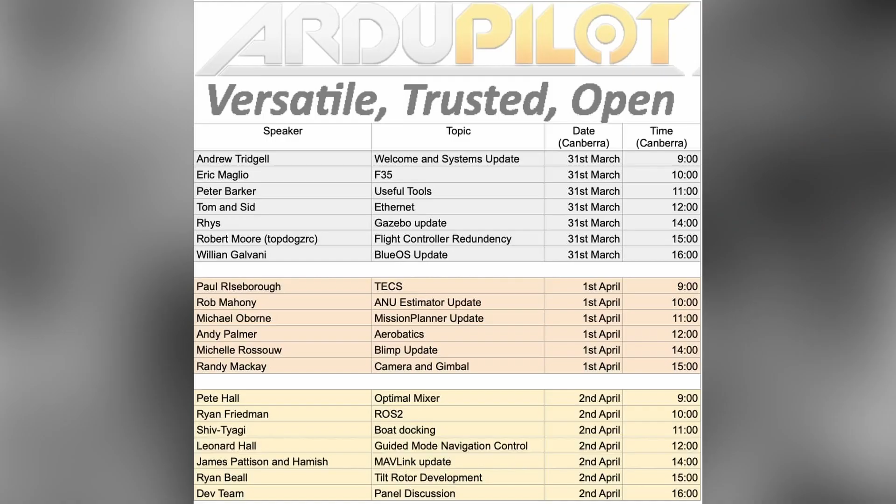At this conference, I'll be talking a little bit about my continuation of work from the last conference in redundant uncrewed aircraft systems.

Wait, is it not sharing again? Oh dandy, let's see. Your screen. There we go. That's good, thank you, okay there it goes. Okay so in terms of... see here, looks like it's the secondary screen. Okay, so let's see, I need to send, let's see, no share, let's try... working now, yeah okay, right.

So in terms of the presentation for the conference, I'll be recapping what my project is about.

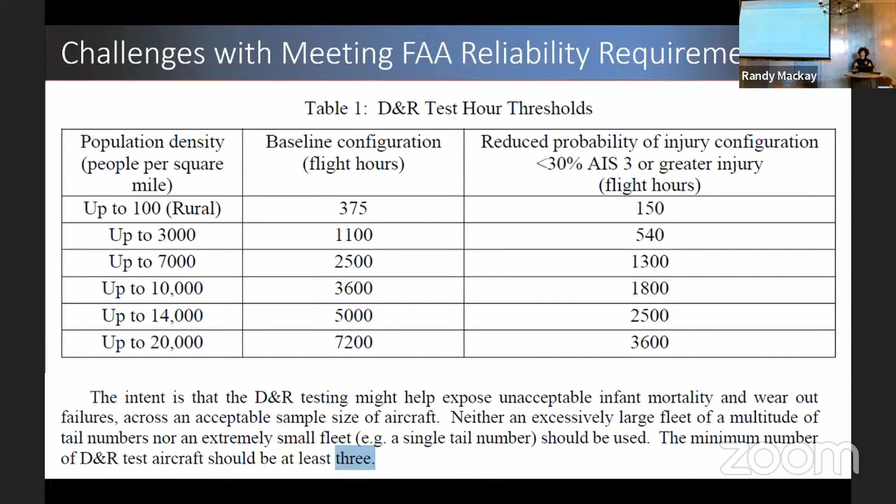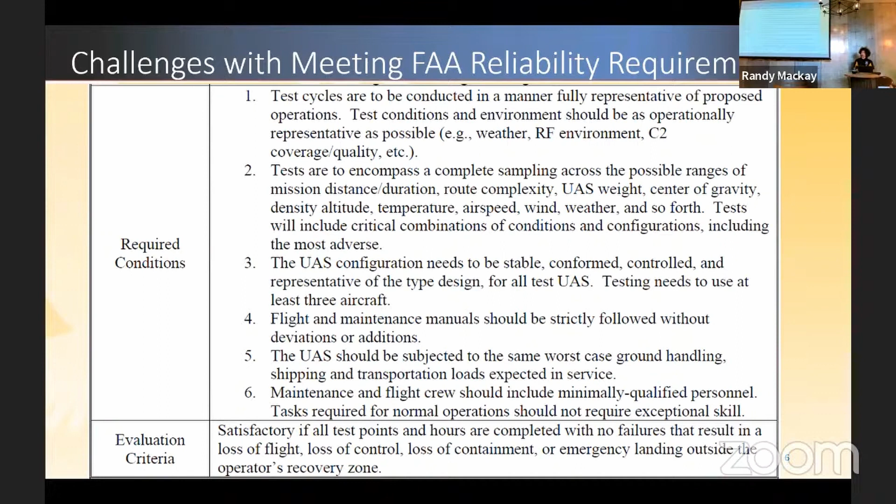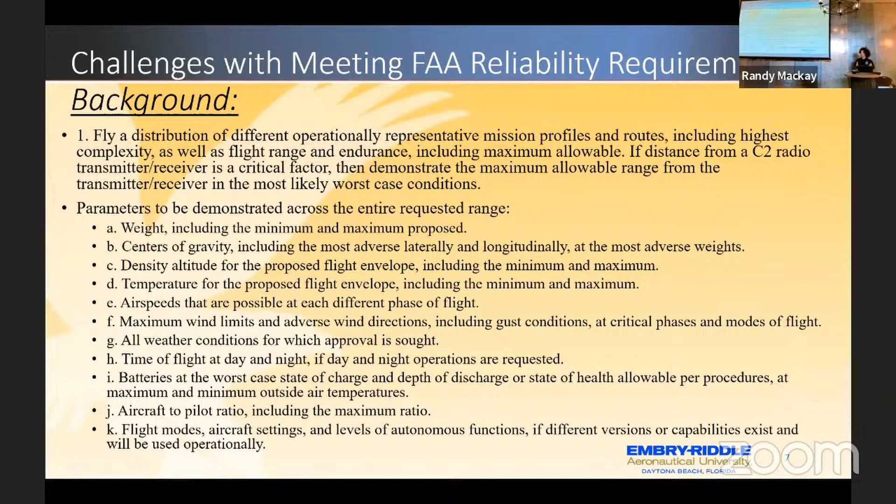And then here's some more background information. Excuse all the text, but it really shows how thorough the process is if you were to go through as an airframe manufacturer trying to get the type certificate.

So this is my current architecture design. I took a model aircraft, the Seagull model Shock Cub. The reason I chose this model was it's a fairly simple bush plane arrangement. It's also the size of a 35cc engine equivalent.

From some of my other airframe experiments, the Flex Innovations RV8, which was an electric low wing, had too short endurance. Then, for another project, I had a 10-foot wingspan airframe, the Bushmaster 120 - it looks like a giant turbo beaver. The problem is that's about 50 pounds, albeit it gets 4 to 5 hours of endurance. That would be within a certain scope, but when I was looking forward, I do want to do things like convert to quad planes. So phase 2 is the standard airframe.

Phase 3 would be essentially doing vertical takeoff and landing testing of the redundant systems. If I were to do that with a large airframe, I'd be at 70 pounds. This airframe, I can be under 50 pounds if I incorporate vertical takeoff and landing hardware, such as a pair of lift booms under each wing. On that note, the airframe did have some hard points to incorporate lift booms where the struts are, so that was another means of convenience.

The airframe gets about 2 hours of endurance, which is fairly ideal. Once you get into the 4-hour mark on a single flight, it hurts a little from the operator on the ground perspective.

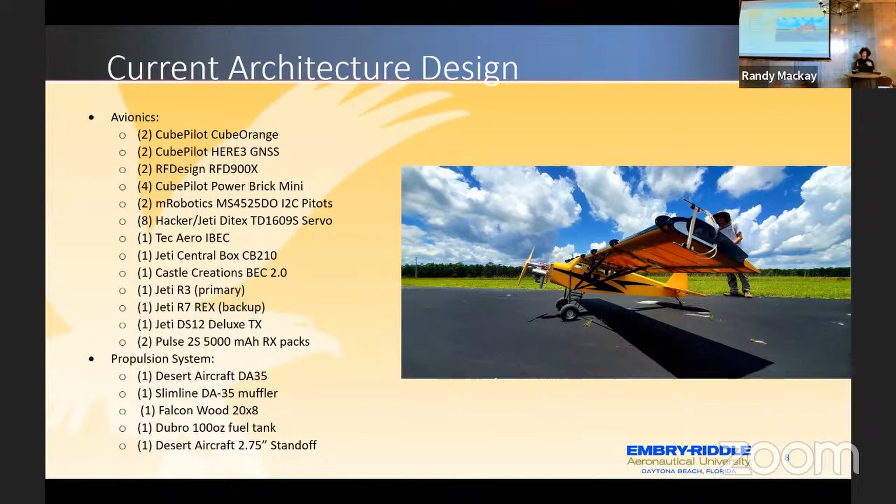On the propulsion system, I went with gas because batteries get really heavy and expensive when you're doing the long flight hours, such as 2 to 4 hours. And it's easier to essentially gas and go with the airframe.

In terms of flight testing hours, I intended to complete a lot more within a year, but many challenges arose. Unfortunately, I did lose access to one of my big test fields where I could go day in, day out. So I had the generosity of a model aircraft field to do my testing, but it was a lot more restricted. Of course, being a master's student as well, you have all the other classes and obligations that you have to do. So within a year to get 31 hours, fairly respectable.

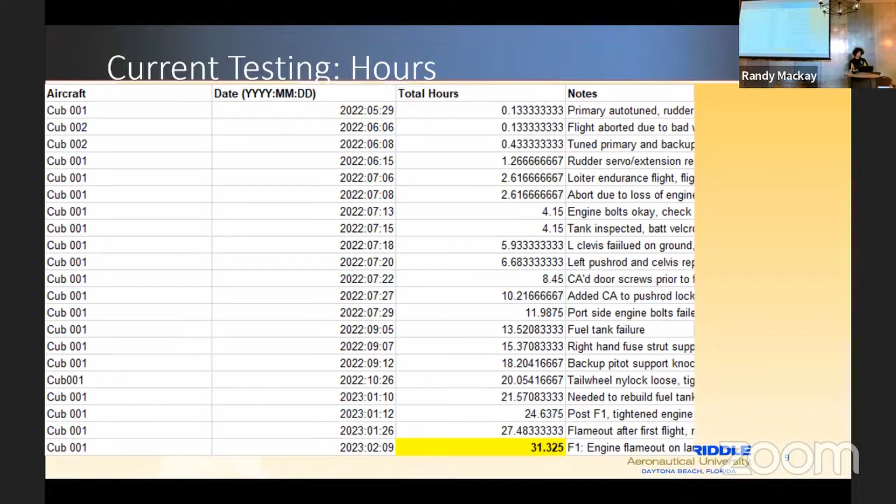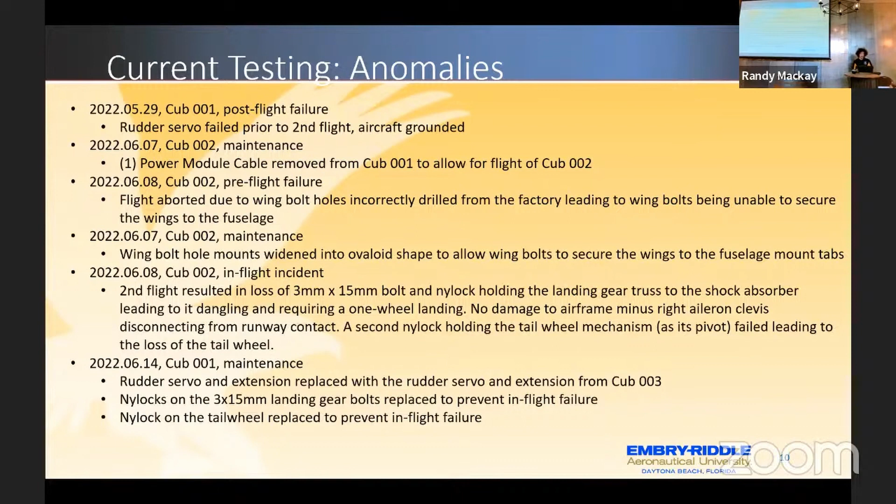There were a lot of things which also got in the way of building up a lot more flight hours as well. I know this is a terrible way to do a PowerPoint with blocks of text, but essentially these are to show that my airframe that I selected wasn't necessarily ideal. Every flight there was a problem, a part broke or some anomaly happened, so I couldn't crank out multiple flights within a day. So my intention was one airframe do 125 hours, next airframe another 125. Instead, I was chasing so many parts breaking on the airframe and a few other minor discrepancies.

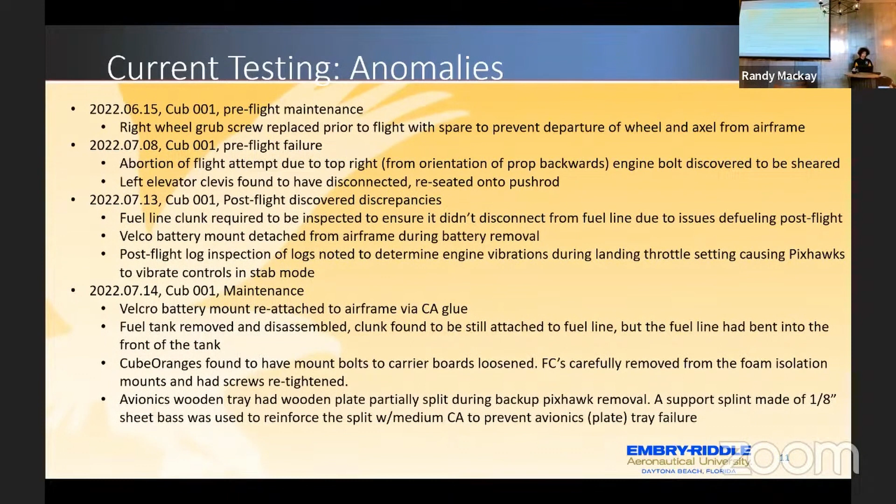There's things like clevises failing and the struts failing, other metal hardware failing. I had a few engine bolts break, and I had a few flameouts. It really shows that going through the flight testing process, depending on the airframe, it can be a real bear if you're trying to get reliability data and everything is breaking.

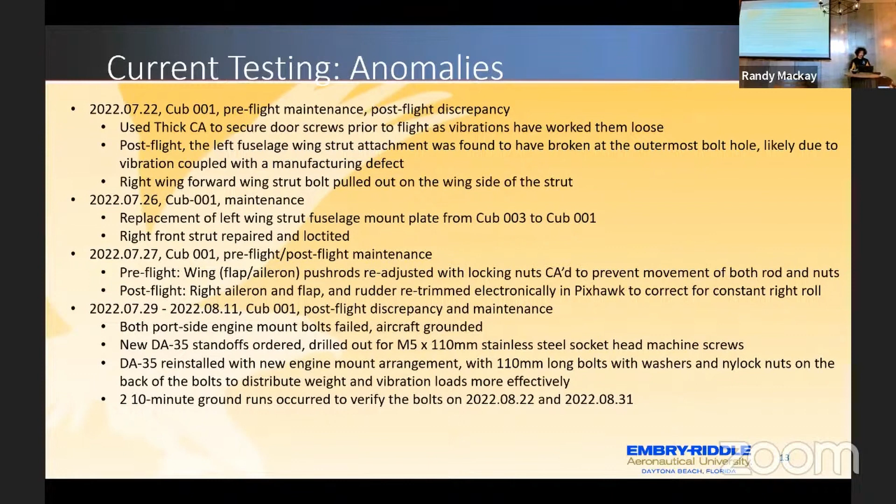This is the kind of data the FAA appreciates. We don't have reliability data, so this is a way to document and say, hey, this is all the issues you could have during sustained flight ops. Then to kind of sum it up, a picture collage showing some of the different things.

You can see metal hardware breaking in the top left. I had an engine gasket let go and it sprayed engine oil all over the airframe. Some of the struts had a screw-in arrangement and they stripped out, so I then had to JB weld them together. And I've had blind nuts just cleanly break on the poor airframe.

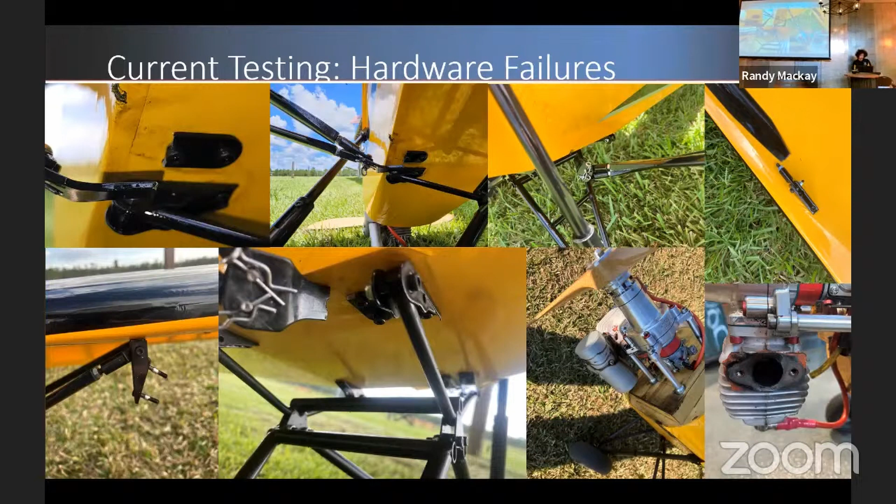I guess this is a better way to show it. So despite those walls of text and the photo collage, this kind of shows over the course of the flights my percentage of failures. Avionics were fairly reliable with exception to a rudder servo dying fairly early on.

The engine bolts breaking - I was pushing the envelope on some windy conditions. I did have some fuel exhaustion events where it would essentially be in the loiter, flame out because the turbulence was excessive, and a 100-ounce fuel tank results in fuel slosh. So air bubble, engine flamed out, land okay.

But the most common were the major anomalies of the struts, clevises, and metal hardware breaking. So the good news is our avionics are fairly reliable. It's the airframes that leave a lot to be desired, and that was a total of 31 failures and anomalies.

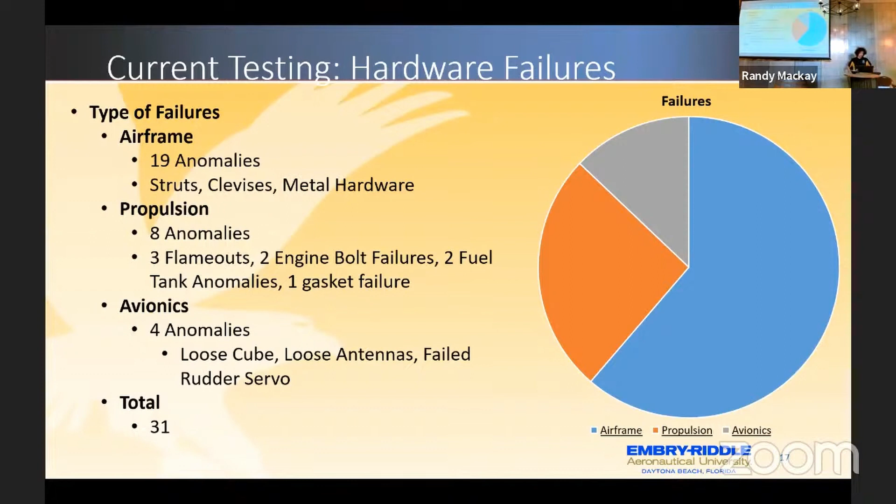In terms of some of my current testing, for my master's capstone I investigate a line replaceable unit of the avionics. This goes into one of the philosophies I appreciate, the right to repair.

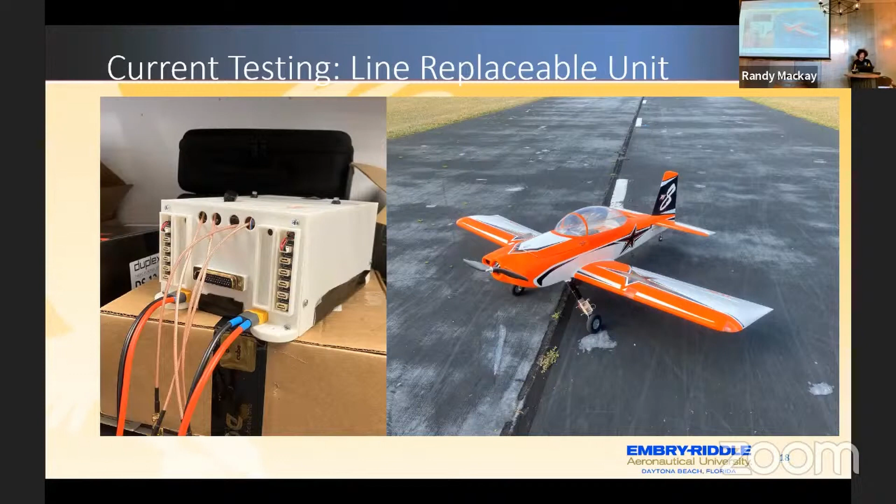One shortcoming I notice of the industry is that many avionics are incorporated into the airframe. If you have an issue with that, you have to send the whole fuselage back to the manufacturer or have the manufacturer fly out. It would be a lot easier for both the operator and the manufacturer if you could remove that avionics unit, pop in a fresh one, and send the faulty unit back if there's a software or hardware bug, because testing only catches so many issues, and Murphy's Law always comes back to haunt us.

So this is the current design. You can see it's two cube oranges, and then you have an RC receiver into each, GNSS for each, an airspeed pitot, and then an RFD 900 for each.

They go into the Jeti central box, which for this I'm using 2-cell LiPos. Depending on what I do, I can have a pair of voltage regulators in line for higher voltage LiPos. The advantage of the Jeti, once again, is I take the Jeti Ditex servos and get telemetry feedback, so if a servo has an issue I can diagnose it instead of guessing whether it failed.

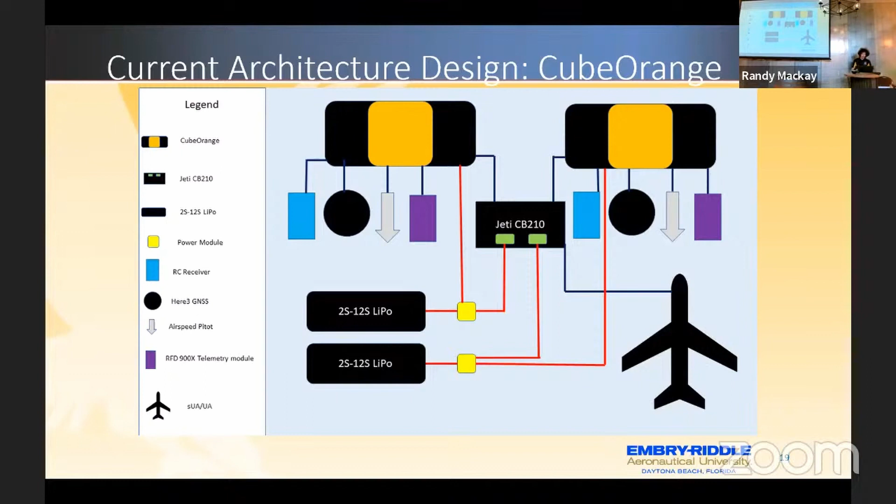And then Philip, I guess you can discuss some of the CubeRed stuff.

So yeah, last year I obviously didn't get to come to the conference - I was otherwise occupied at Formula One. But I did have the pleasure of listening to Rob's talk and got to have a bit of a virtual chat online on that one. Myself and Rob have been interacting ever since, and it's been great, especially how ArduPilot brings all sorts of different people from different places together.

Looking at the redundancy side of things, it's a topic all of us have been talking about for a long time, and a lot of people have done a lot of work on that. A core part of that is the work Leonard's been doing with standby mode, which without it becomes really complicated and messy, a very ugly takeover if you don't deal with some of those I-terms and things like that.

On the CubeRed, we've gone for an architecture which is basically two autopilots in one. We have a primary autopilot that does all the fun stuff like Ethernet and normal day-to-day things, and a second autopilot that can do the simple things. So if something goes wrong, you can basically package what Rob had done with the two cube oranges into a more convenient package.

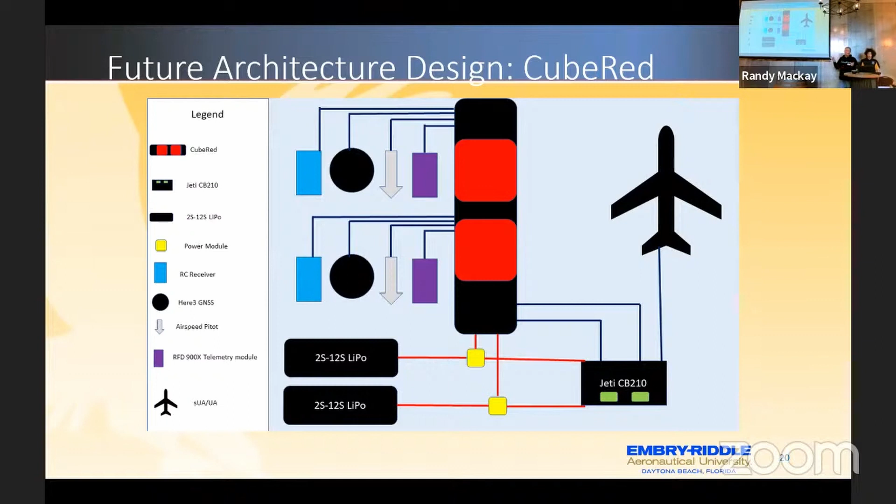However, this is not the only way to do redundancy, and there are other ways coming up that might be a little bit more interesting. You could whack a whole bunch of distributed cubes around the place, which I think is shown in there with 4. That might be a convenient way.

Or another way you could do things is things like our Here 3 Plus and our Here 4 that's coming up soon, Here Pro, actually have all of the components on board to be an autopilot. So rather than having everything in the little vibration isolated box, you can potentially be running an instance of ArduPilot on a node somewhere. So you could distribute it completely.

This little beastie, which I've probably shown a few of you, is our little CAN bus node that we're sort of working on. It has enough power on it to run ArduPilot a few times over as well. So a concept of a more distributed autopilot system on a distributed CAN bus also can deal with issues like structural damage to the aircraft, taking out a CAN line or something like that. It can also be very convenient if you're doing a payload vehicle where you don't actually have a center to the aircraft.

So Rob's been doing some great work on that, and so have many people here. And Sid's been doing some great work on the upcoming architecture of the red, and it'll be really cool to get some of that stuff out and ready.

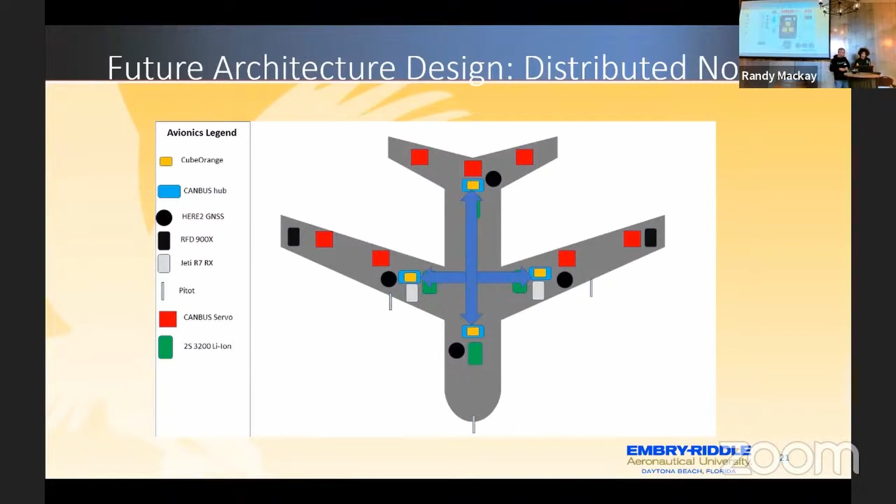Now, to kind of bounce off what Philip said in terms of that carrier board should not be used as a power supply, there was something that came out in the RC community recently from a well-known company called Powerbox Systems, called the Powerbox Royal SR2, I believe. The one thing that really piqued my interest was its new protocol system, P² bus.

Not only did it have the servo outputs, which it provides power distribution to, it had 4 P² buses where essentially one could consider it like, I know this is a bad way to consider it, like a CAN bus node RC equivalent, or better yet, the old S-bus hubs and nodes that you could plug in, except these have telemetry feedback. So I was thinking, well, potentially, I know that this could work.

Why not have something that's both the carrier board for multiple redundant cubes, but also then be a power distribution hub for, say, a giant scale airframe. So we're talking like 25 pounds, 30, 40, 50 pounds, something like a 10-foot wingspan, a larger Group 2, Group 3 UAV. That way you could run something like 16 servos and have that power supply, which didn't burden down a carrier board.

And then have plug out auxiliaries for something like, in my case, I was thinking a DroneCAN Powerbus. So you could have maybe 4 different DroneCAN nodes, which could provide power to. It could then essentially, you could then have those DroneCAN nodes provide telemetry feedback. You could then also control camera systems, maybe have an S-bus out system.

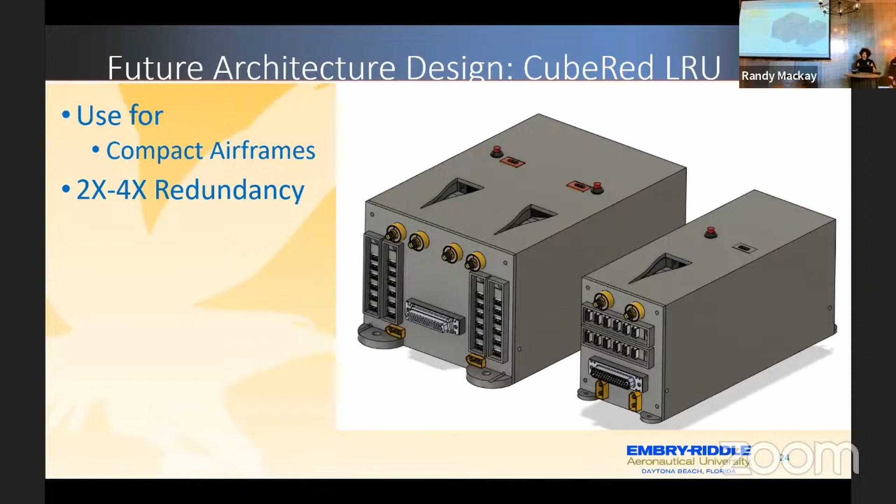For future flight testing, right now I'm at a crossroads where I could replace a lot of the metal hardware on the shock cubs and pray that they still stay together, because it would be nice to get that data to say 125 hours per airframe, just to see if I hit a steady state where no more parts break, or if I still have these issues throughout.

If it really becomes a headache, an airframe that I wanted from the get-go, which wasn't available, is the Bushmaster 100. The Extreme Flight Bushmasters are incredibly simple, incredibly rugged. You can gas them up and go, and you can knock out a bunch of flights without worrying about parts breaking left and right.

And of course, the most important thing I want to do after the standard flight testing is a reliability test with quad planes, because there is a market push towards a lot more VTOL airframes.

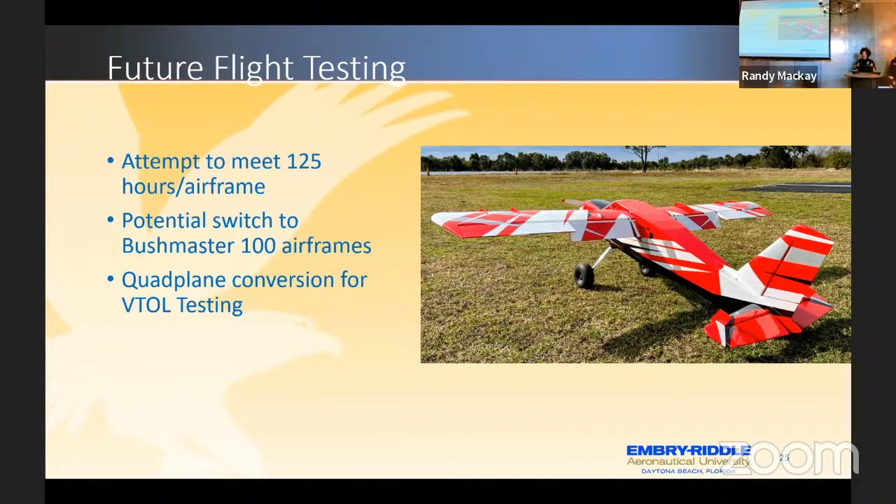I believe this is the last airframe. Oh, no, video's good. One other thing that I did - come on, let's see. Oh, there it goes, I think.

So I did do a little bit of business development as part of my master's.

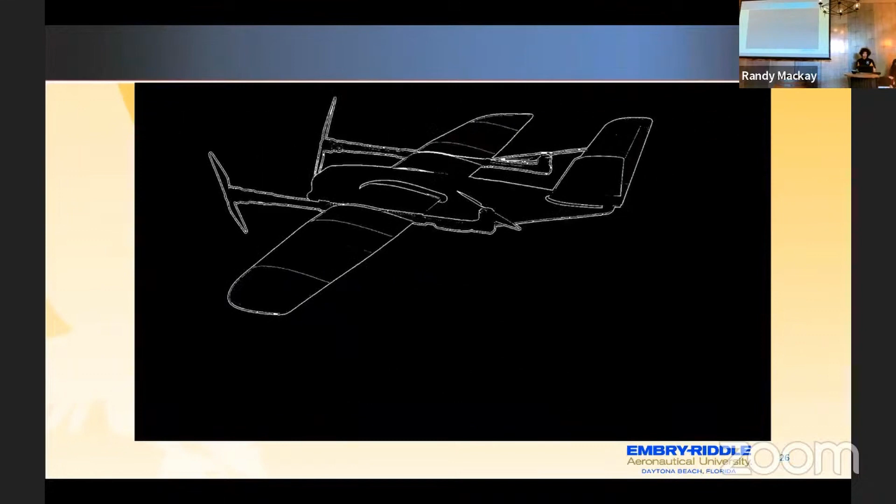To provide some clarification on the video: with the RV8, the initial roll maneuvers were just testing primary to backup switchover, and the backup killing the primary. With the severe upset recoveries, that was me putting it in the worst possible case scenario - essentially a deep stall, cover and maneuver - and the backup did the switchover and took it over. I had no input into that. And once it proved that it was reliable, that's what led to me switching to the shock cubs.

As you can see, beginning the VTOL process, there's still a lot of work to do. There are many different states you have to account for, such as transition between vertical lift and horizontal. What does it do in horizontal flight? What does it do in standard flight and vertical lift? And the Lua script just blows up in size as a result.

In terms of concluding remarks, this is what I've learned over the process of the past year: the airframe has to be as reliable as the avionics, otherwise you're going to have a bunch of headaches building up flight hours. Multiple avionic architectures are required, and having industry input and discussion would be vital. And of course, I need to pursue further flight hours to gain reliability data.

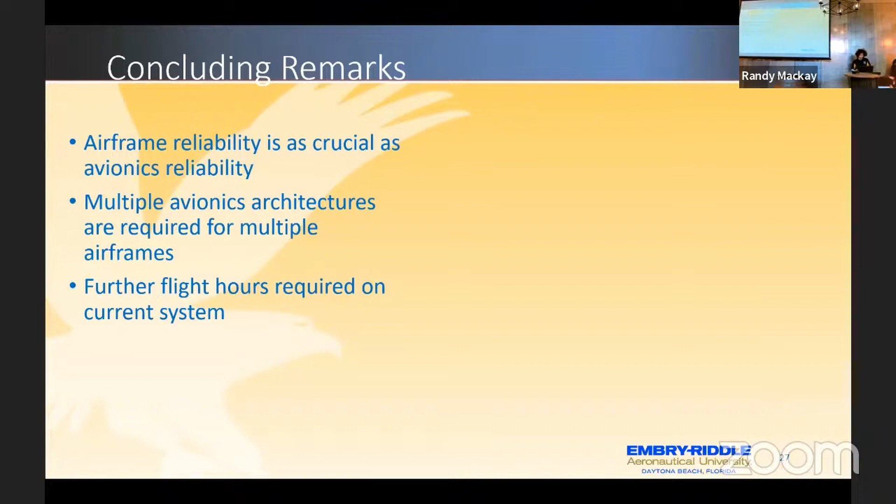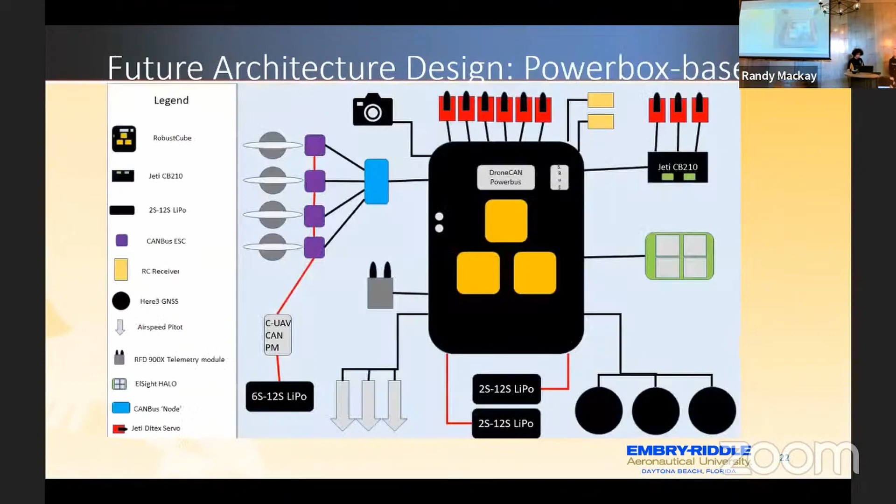Then you've got your traditional integrators, things like controllers, and then you've got things like states, which if one gets read...

The way I designed standby mode was it basically follows everything, so it takes all the same inputs. So if you change mode, change to loiter, it'll follow those modes, but internally it prevents the buildup of position controls, attitude controls, and all that sort of stuff.

So the thing is, if for some reason you have a failure, that means the autopilot that is not selected to fly the aircraft is actually flying the aircraft, because you've got a failure in your servo output selection circuit. So you're actually locked on, that's another design decision. I wanted to ensure that if you failed there, even though it was the unselected autopilot with its integrator at 0, it could continue to fly the aircraft. It's just that it would tend to have a bit of lean error and that sort of stuff here and there.